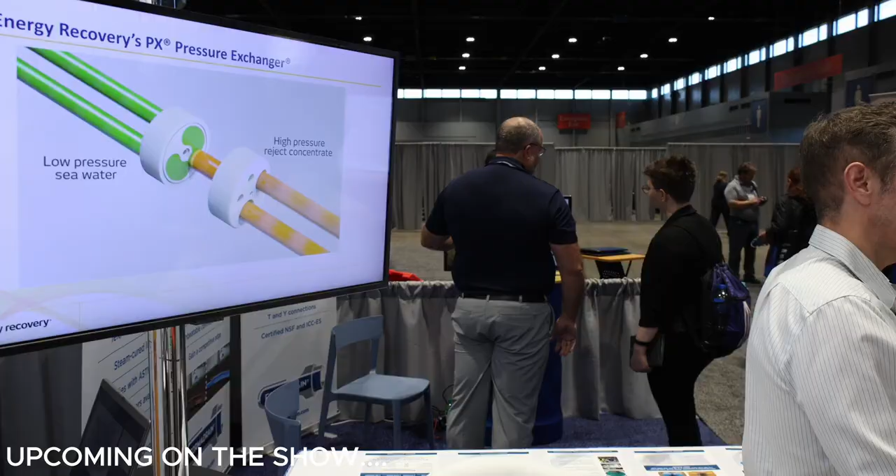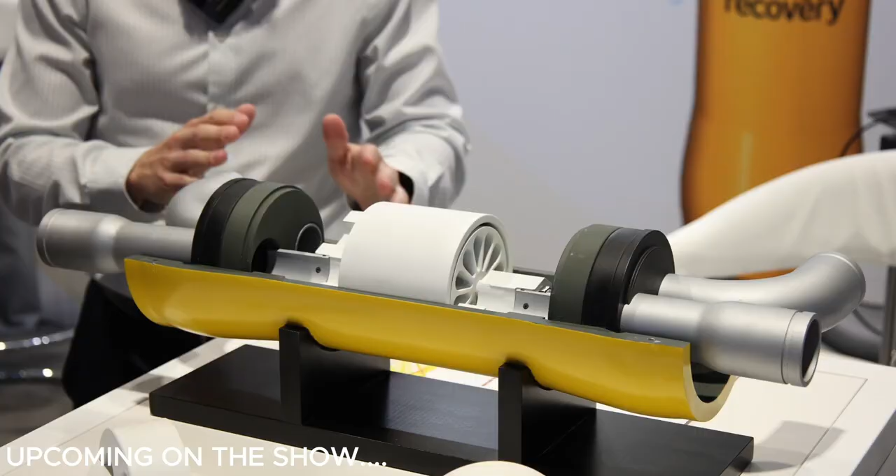We manufacture energy recovery devices for primarily the desalination industry. The company was founded a little over 30 years ago because desalination isn't something that's being done much in the US. Within the CO2 space, that's our newest business unit, and that's where we're starting to see some traction now. We've won some awards for product innovation in that space as well. The engineering concept is still the same, it's completely driven by the brine flow. There's no motor, no electricity, only one moving part, the rotor. The downside is that as the piston moves back and forth, there's wear associated with that. We're based in California, and all of our manufacturing is done in the United States.

Okay, I'm here with Kadaj with Energy Recovery. Thanks for doing this interview with me today. My pleasure. So give me a brief overview, what do you guys do?

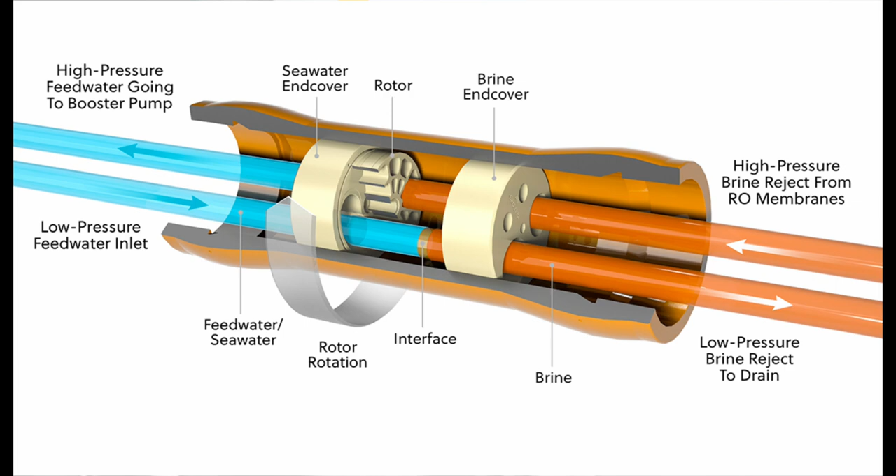Energy Recovery has been in existence for about 30 years, we had our 30th anniversary last year. We manufacture energy recovery devices for primarily the desalination industry, although now we're getting involved in industrial wastewater treatment, municipal wastewater treatment, as well as CO2 refrigeration.

How did the company start, come into existence? The company was founded a little over 30 years ago by the original founder, a Norwegian gentleman who actually created the original pressure exchanger for a completely different application than desalination. The company was founded and moved to California back about 30 years ago, and ever since then we've been primarily involved in the desalination space and have really done quite well in that space.

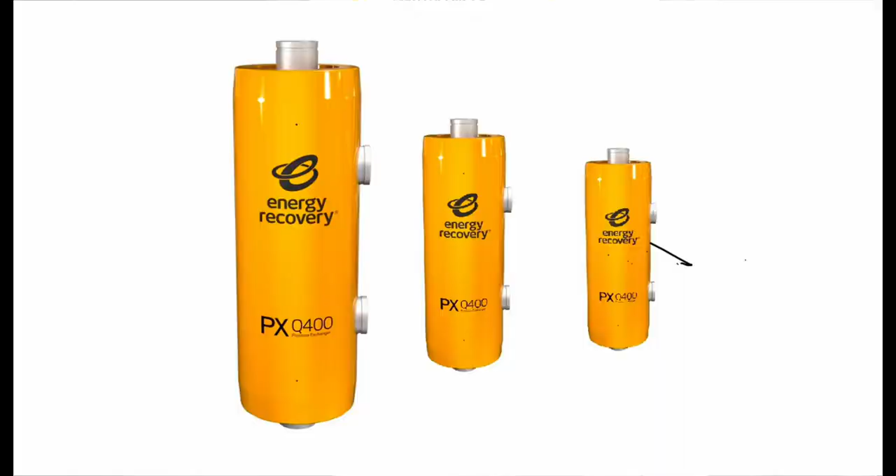So what are we looking at here? Is this one of your... Yeah, this is one of our flagship pressure exchanger devices. In a typical RO, reverse osmosis membrane system, you have a high pressure pump that pumps all of the flow and pressure through the membrane system. Two streams come out: a permeate stream at low pressure, and a high pressure brine stream that, if you don't have a pressure exchanger, you'd have to throttle through a valve to reduce that pressure down. When you implement the pressure exchanger, that valve goes away, and the pressure exchanger essentially acts as a second pump in parallel with the main high pressure pump.

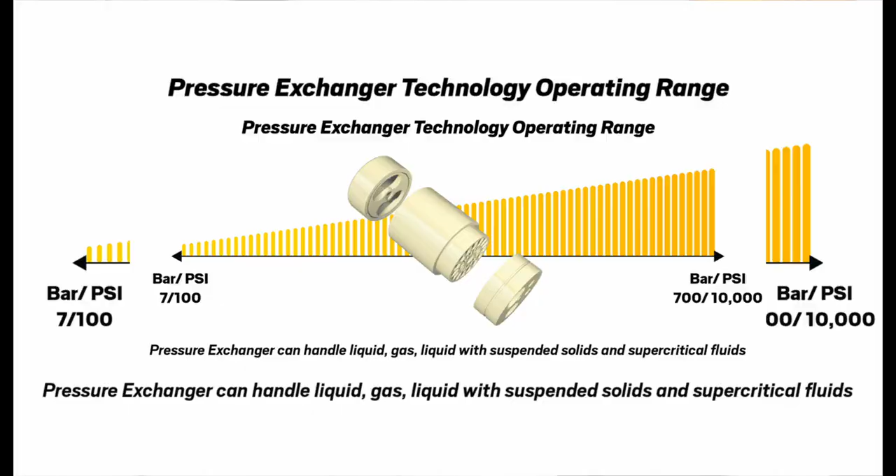The high pressure pump now only has to process 40% of the original flow, because the recovery of typical seawater desalination systems is around 40%. The other 60% is processed through the pressure exchanger, which allows the main high pressure pump and its motor to be reduced, cutting energy by about 50 to 60%. Is there any electricity that goes into this?

So it operates itself? It operates itself, completely driven by the brine flow. There's no motor, no electricity. There's only one moving part, which is the rotor here in the core of the product itself.

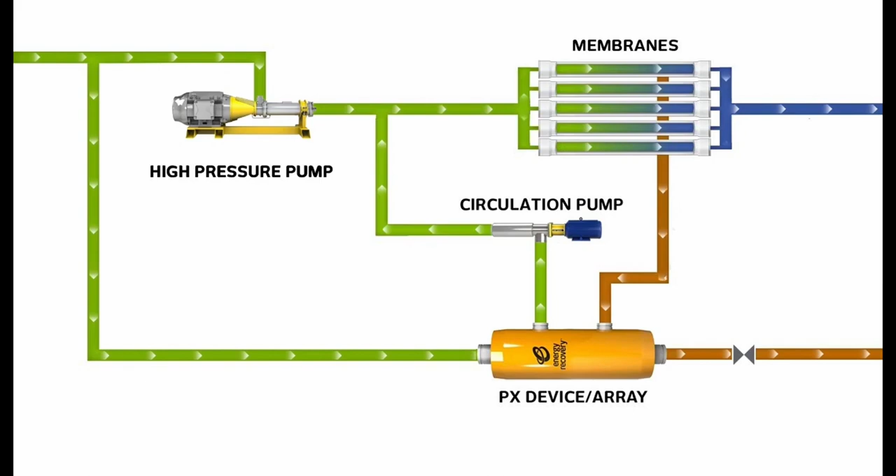So can you show me how the water comes in? How does the actual water flow through this device? Sure, there's two inlets and two outlets. The low pressure seawater comes in and fills one of these channels as the rotor is spinning. Once the channel is full of seawater, the rotor spins and it's exposed to high pressure brine coming in through this side, which ejects that seawater out through this connection into the membrane. There are no physical pistons in the product itself, it's water on water contact, so it's a water piston. You can think of it similarly to a positive displacement pump, just without physical pistons.

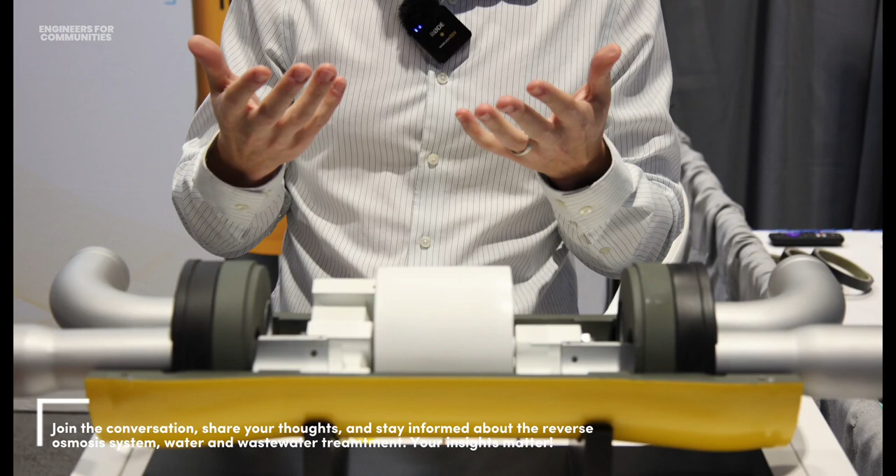So once that water is ejected out, now one of these channels is full of brine. That brine has to go somewhere. As the rotor continues to spin, that brine is exposed to the low pressure seawater, which then ejects the brine out at low pressure. The process simply repeats itself over and over again. So there's just one moving part. Does it wear? What's the maintenance, the life cycle on something like this?

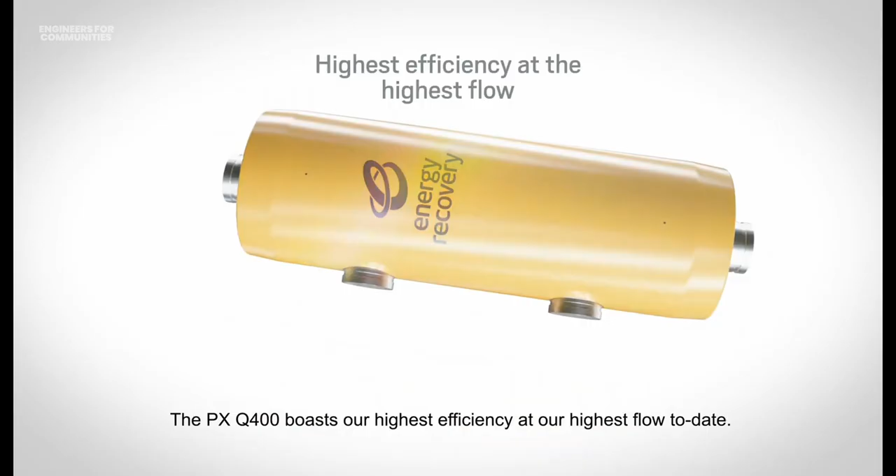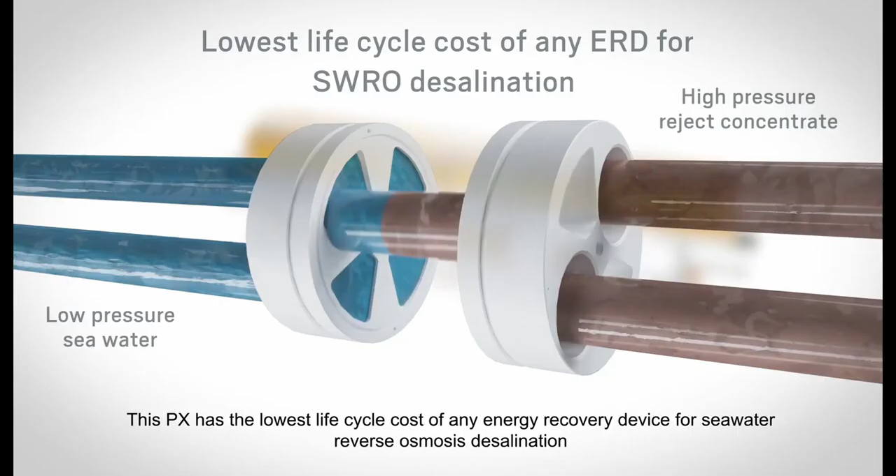Yeah, so that's the beauty of the PX. The core of the PX, which is the entire cartridge, but the rotor is the most important part. It's made of our own proprietary alumina ceramic. We're completely vertically integrated, where we go from pure alumina ceramic dust all the way through the machining and the firing process to create these internal components. There's no maintenance, there's no downtime, and they're designed to last for at least 25 years.

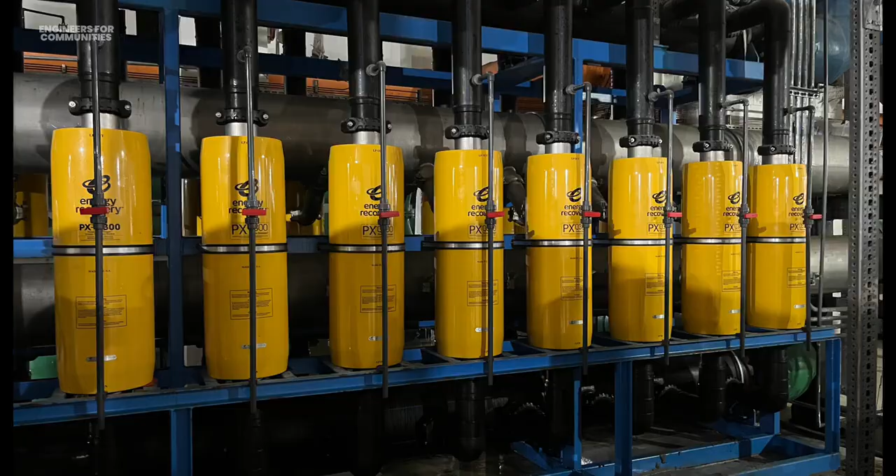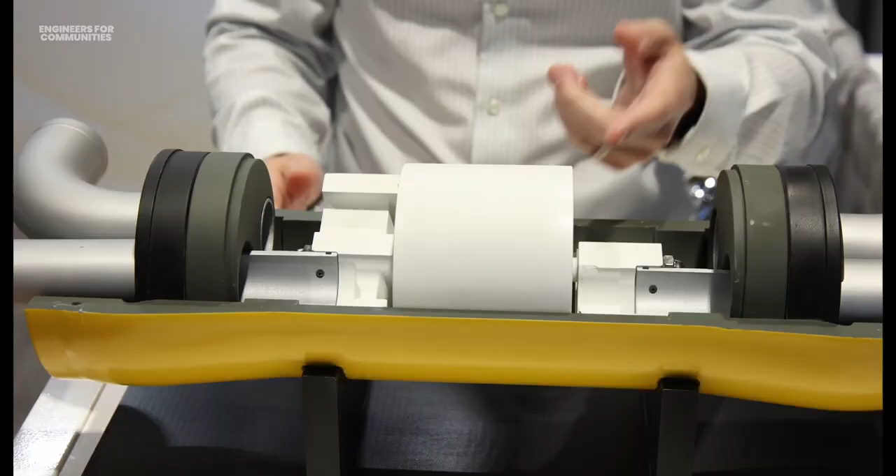So you mentioned it doesn't have any pistons. Do some of these kinds of devices have that kind of mechanical wearing? There have been other energy recovery devices that do have physical pistons, very large physical pistons, and the downside is that as that piston moves back and forth, there's wear associated with that, and eventually the piston will wear out. Whereas here, there's really nothing to wear. The rotor rides on a very thin fluid film, so there's no contact between the rotor and the sleeve, and there's no contact between the rotor and the end covers either.

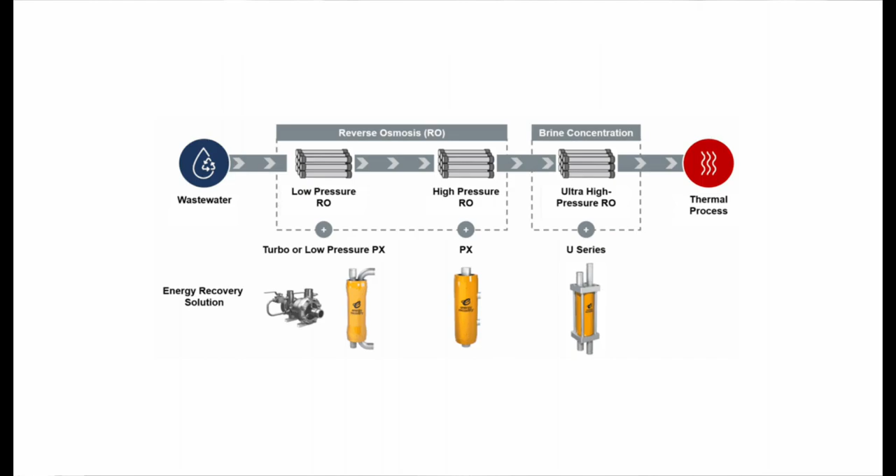That's pretty neat. All right, you mentioned two other applications. Industrial wastewater, and then CO2 refrigeration. I think you also mentioned mining as well. A lot of these are used in conjunction with membranes, but you have some applications where that's not the case. That's true. So outside of the water space, outside of the wastewater space, there are two applications that we get involved in at this time.

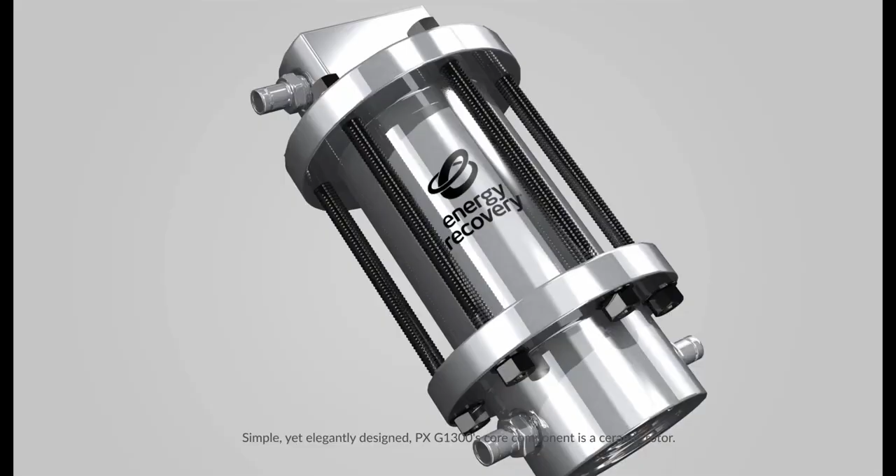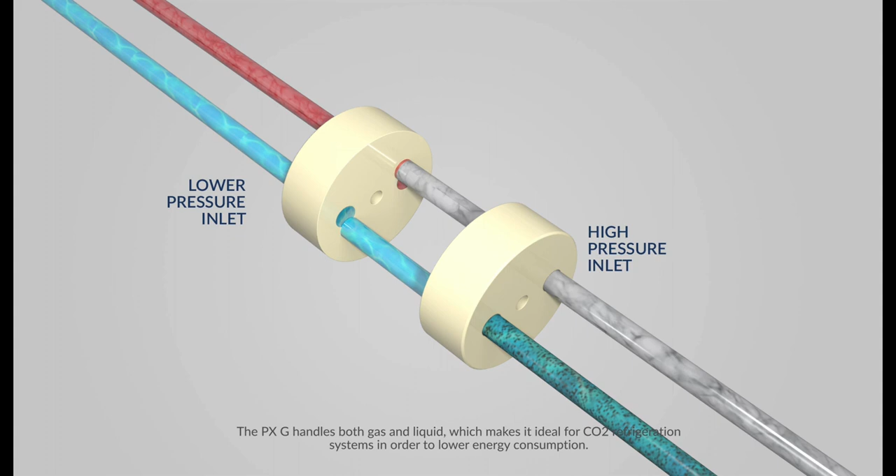One is CO2 refrigeration. If you think about a standard refrigerator or freezer, you have a refrigeration process where you're dropping pressure on one side when the CO2, the liquid refrigerant, expands, and on the other side it's compressed. There's no membrane there, but the pressure exchanger works in any process where you have a pressure drop on one side and pumping or compression on the other side. Within the CO2 space, that's our newest business unit, and that's where we're starting to see some traction now. We've won some awards for product innovation in that space as well. So that's just now starting to get off the ground.

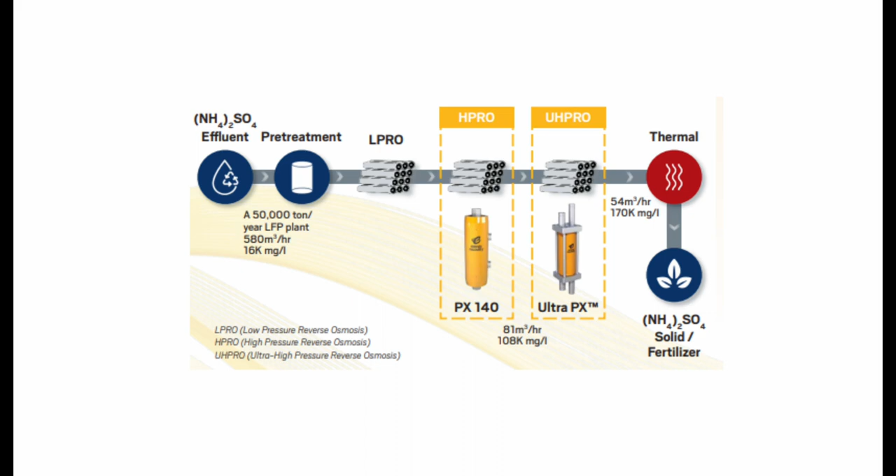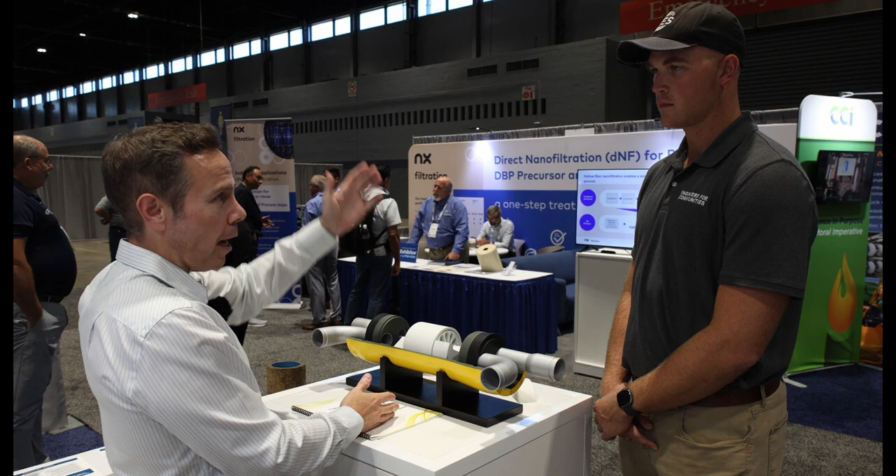The mining application I spoke of is for mine cooling in these deep half-mile and one-mile down mines. At the bottom of the mine shaft, it gets extremely hot because the deeper you go into the earth, the hotter it gets. So when you have people working at the bottom of these mines, you have to keep them cool. There's basically a giant air conditioner down there. It's an air cooled device where you have cold water blowing over this type of heat exchanger, and that creates the air conditioning.

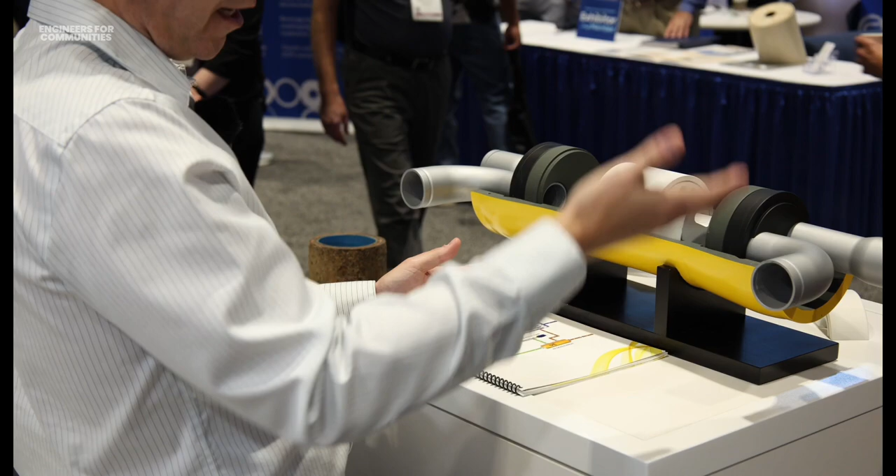So you have cold water coming down the mine shaft on one side, and once you get to the bottom of the mine shaft, you have a tremendous amount of head built up in that pipe. You can't use the water at that pressure at the bottom of the mine, the pressure is too high. Now on the other side, once the cooled water has given up all of its thermal component, you have to pump it back up to the surface so it can get cooled again and the cycle can repeat itself. So again, we have a situation where you have pressure drop on one side and pumping on the other side, and the pressure exchanger is used in the exact same way. It's just the fluids are a little bit different, but the theory of operation is identical.

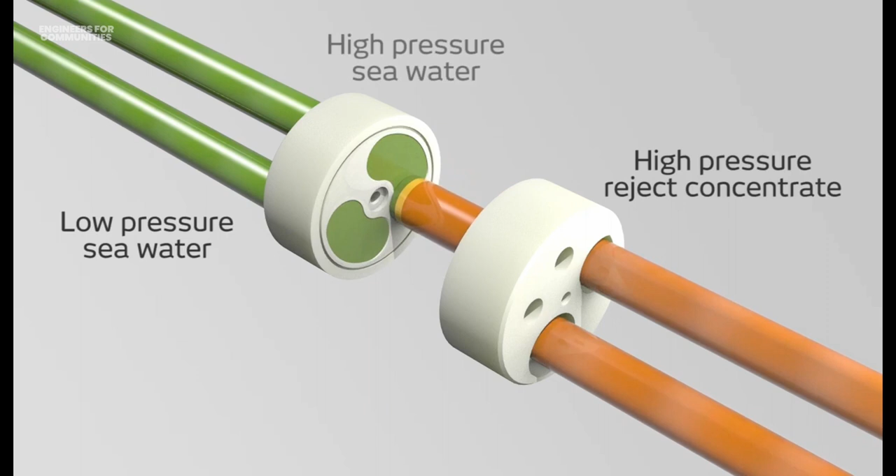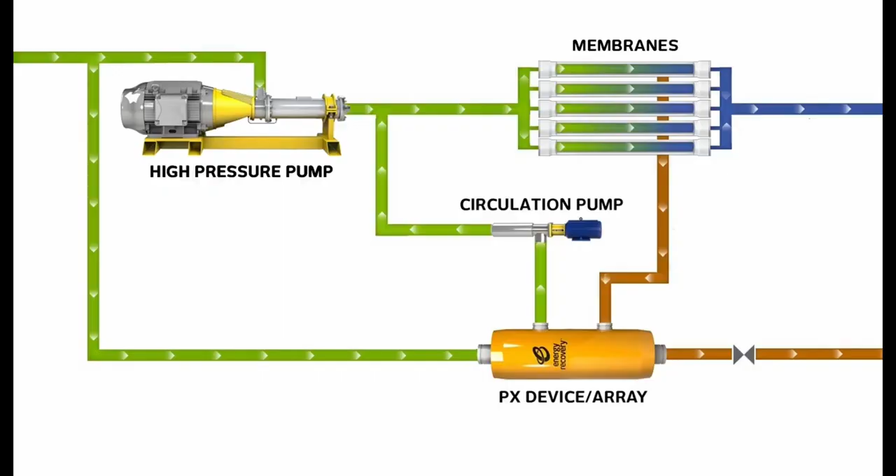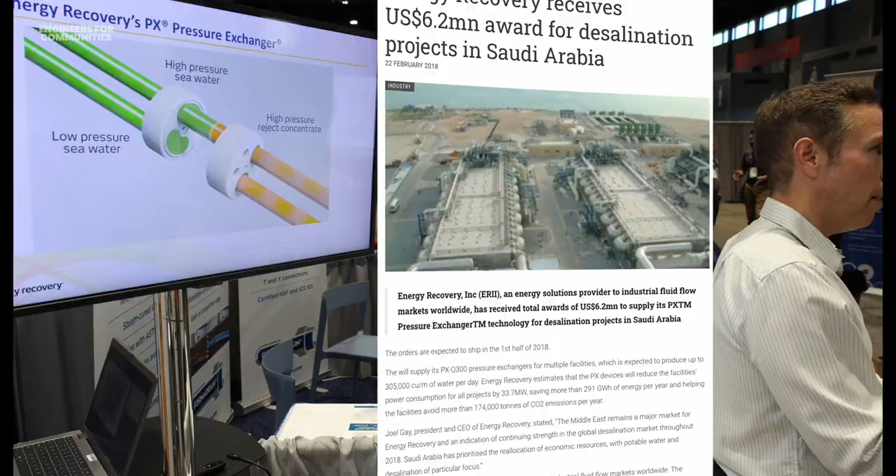That's correct. Do you guys operate mostly internationally or in the U.S.? We're based in California. All of our manufacturing is done in the United States. The majority of our business is outside of the United States, and the primary reason is because desalination isn't something that's being done in the U.S. very much. Our largest market is Saudi Arabia, that's where a lot of the desalination is going on. But we're starting to see things pick up in areas like China and India, where there's a lot of water scarcity, large population growth, and where they really need water.